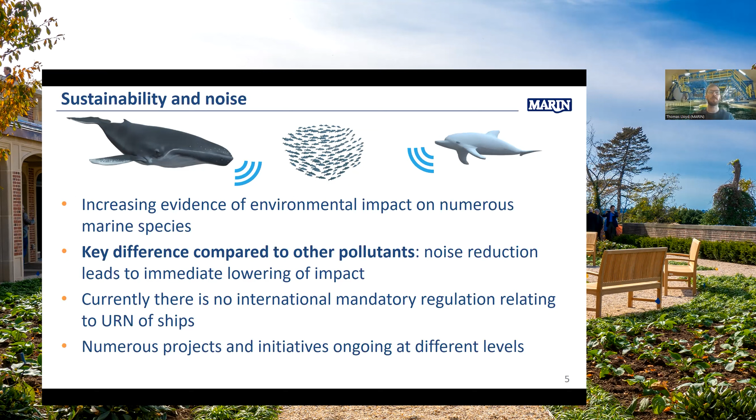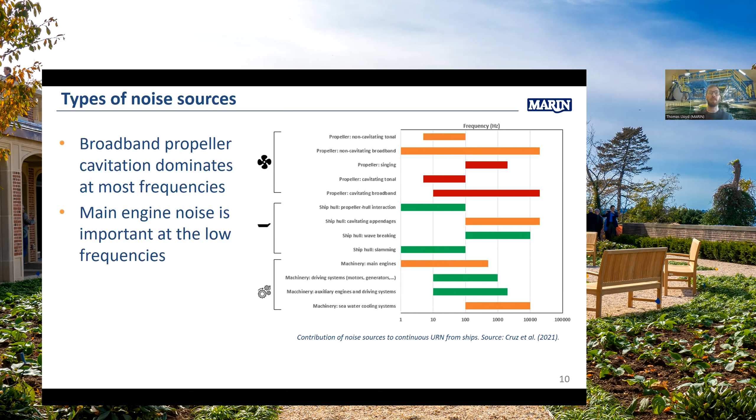Starting with noise sources. Here we can see an overview of continuous noise sources from ships. The main ones are propeller cavitation. At low frequencies, there are strong tonal components, but in general, broadband noise is important over a wider frequency range. At very low frequencies, the machinery noise from the main engines can be the dominant noise source, and this is certainly the case below the cavitation inception speed.

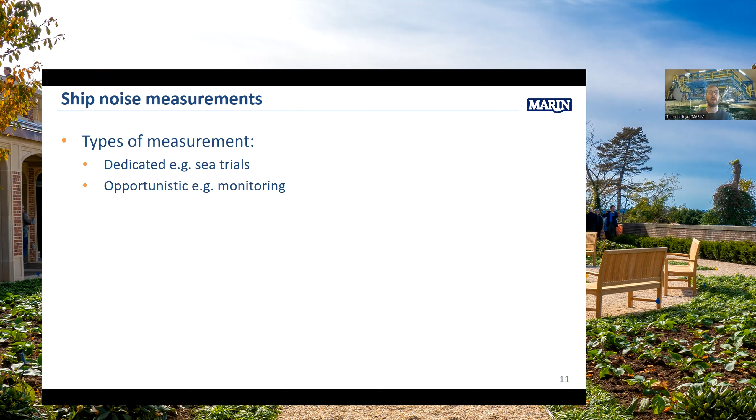So with those noise sources in mind, we now look at how ship noise is measured, of which there are 2 main types of measurement: so-called dedicated measurements, such as sea trials. These may be performed by shipyards who have a noise requirement in their design, or classification societies. And there are also opportunistic measurements, such as for monitoring purposes, in order to track the changes in ambient noise in a particular area over time.

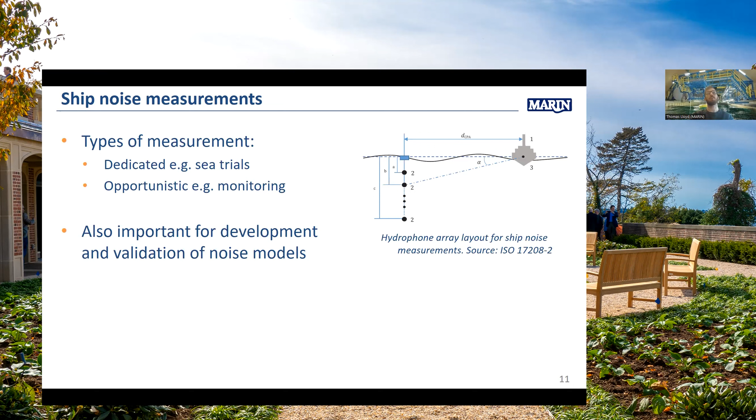And in order to perform measurements, procedures have been defined. Here we see an example from an ISO standard of recommendations of how to deploy hydrophones. In general, these types of measurements are also important for the development and validation of noise models, which I'll get to in the next slides.

This field is developing quite rapidly, and at the moment there are alternative proposals to deploying hydrophones, such as the use of onboard sensors and even drones. With onboard sensors, the idea is that you can monitor noise levels continuously across a whole voyage, which provides more information and can be used for real-time decision making. Drones have been proposed as a cheaper solution for performing noise measurements, but that's very much in its infancy at the moment, so we'll see what happens with that.

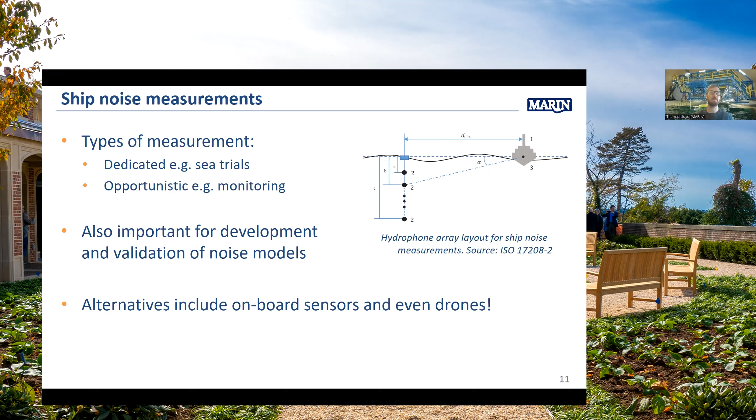Now a little bit about the standards. As I mentioned, there is an ISO standard for measuring noise, but it currently only applies to deep water conditions, while work is ongoing for a standard which can be used in shallow water, which is particularly important in Europe, but of course also in other parts of the world. Some other procedures have been proposed by classification societies and also by the ITTC, but we see some differences in the procedures in terms of how the measurements are performed and how the data is analyzed and corrected. That leads to difficulties in interpretation of the results and comparison between ships and between measurement locations, which has led to proposals for harmonization of the procedures in order to reduce this high uncertainty.

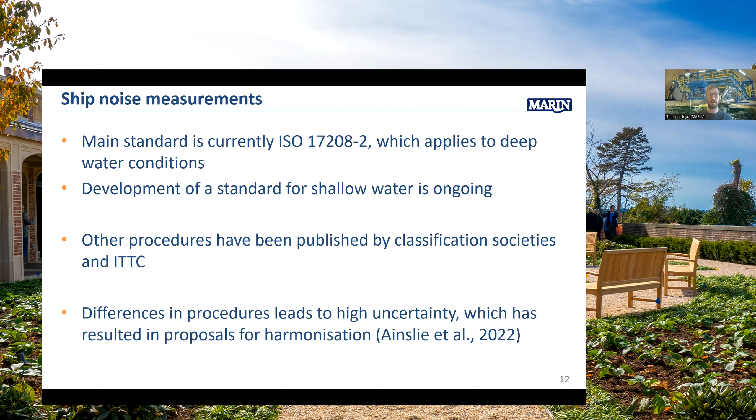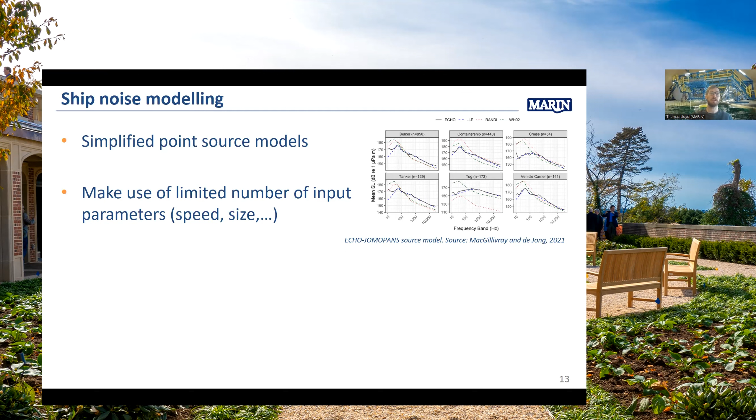Now moving on to modeling. Modeling in the context of noise mitigation is typically performed using simplified point source models. Here we see an example of a recently published model called the ECHO-JOMOPANS model. We have the frequency on the x-axis and the mean source level on the y-axis, and this model has been defined for 6 different ship types. It's an empirical model, and it can be used in combination with, for example, AIS data to perform modeling studies into the effects of noise in a particular environment. An advantage of this kind of model is that the number of required inputs is quite low, typically the speed of the vessel and a parameter related to the size, such as length or displacement.

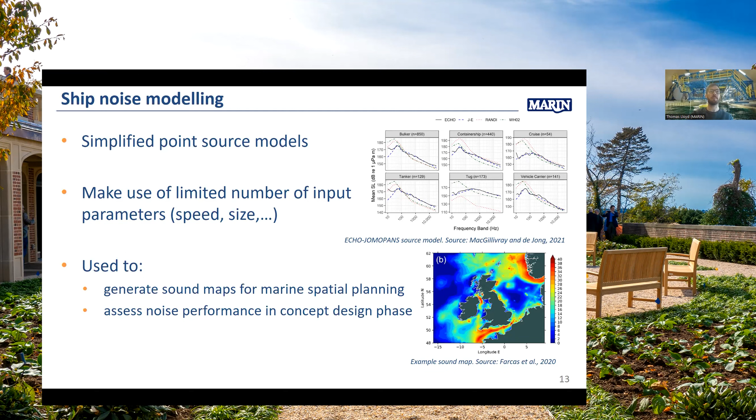So how are these sound maps generated? Well, you can use the AIS data, which is freely available, in order to look at the traffic density. Based on the traffic density, you can define the source levels and the noise footprint from the ships. Using propagation models, the sound level can be estimated at the receivers. In this case, in order to generate a map, points are defined across the whole geographical area, and that allows the total sound field from all the sources present in that region to be estimated. Following that, statistics can be defined in order to be used for marine spatial planning purposes.

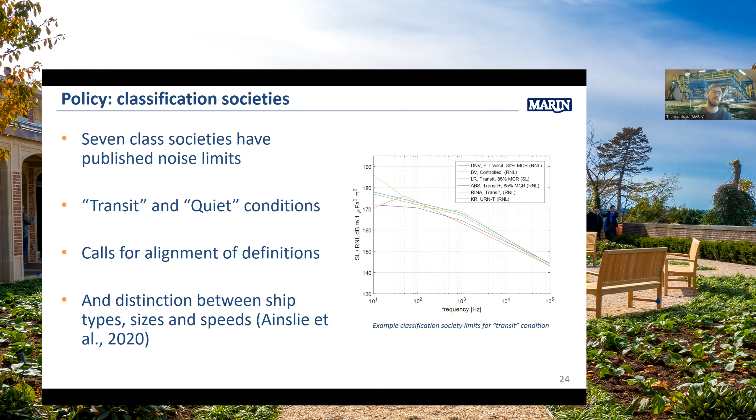So it is possible for commercial vessels to achieve these limits, and we'll see what happens in the future in terms of improvement of the limits, but also ship designs in general, looking to reduce noise levels.

And finally, regarding policy, I want to touch on voluntary certification, which, of course, again is not mandatory legislation, but it's a way of ship owners or operators demonstrating their environmental credentials. This doesn't just relate to noise, also to other environmental performance indicators.

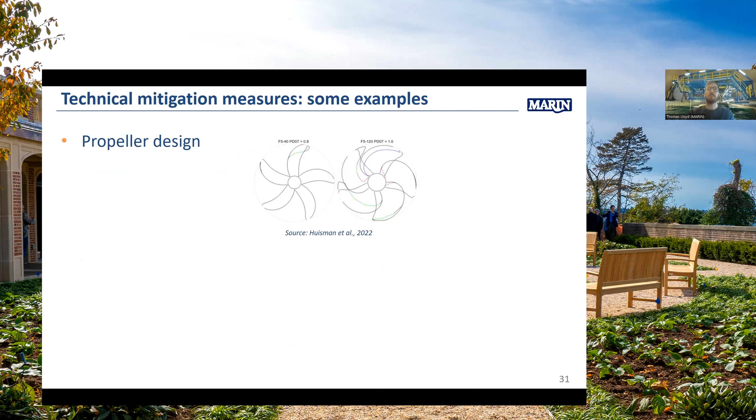Now I'd like to give some examples of mitigation measures, divided into technical measures and operational measures. Technical measures cover things like propeller design, reducing cavitation, noise generating cavitation, and changes in hull design, improving the wake field and the inflow into the propeller, which also reduces the cavitation dynamics, one of the main noise generation mechanisms.

Isolation of machinery: here you can see that the main path for machinery noise to radiate underwater is through the mountings onto the ship structure. If you can isolate the machinery from the ship structure, then you can drastically reduce this transfer of noise through the hull plating.

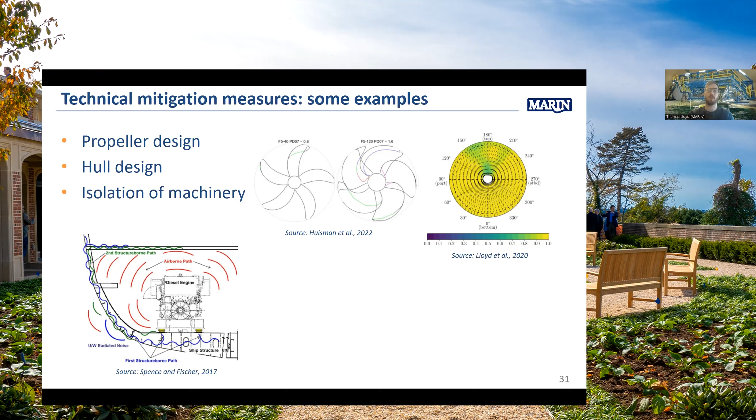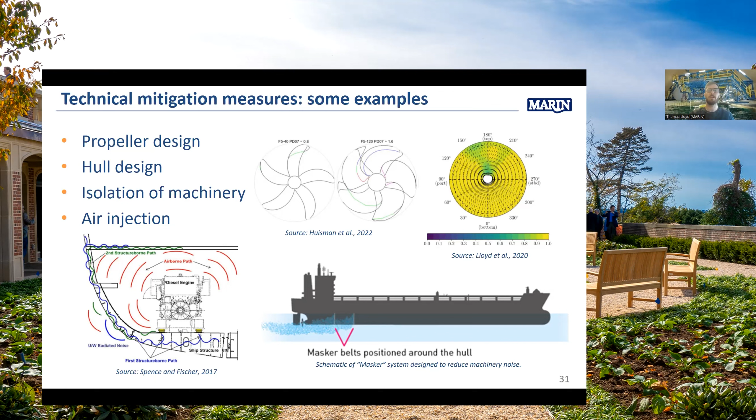Another concept is air injection. You can generate essentially a bubble curtain around the aft part of the hull, designed to shield and isolate the noise radiated from the machinery, but also potentially from the propeller. In this way, you have a system which can also be retrofitted. There are various options available, but it's important they are considered early on in the design process in order to reduce the costs which come with implementing one of them.

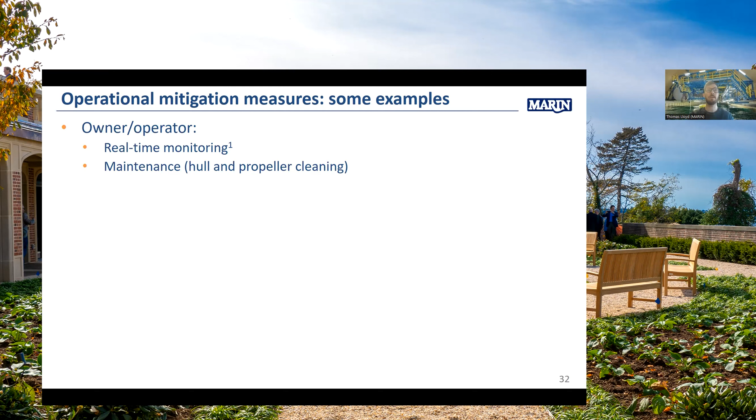Now we move to operational mitigation measures. These are generally split into two categories. We have those for which the owner or operator is responsible, such as real-time monitoring and maintenance. Real-time monitoring can be used to allow decision-making on the bridge in terms of noise levels, so the master can get a warning when exceeding a certain limit, and the system can advise what to do about that. Hull and propeller cleaning is important to reduce resistance and power requirement, but also therefore to reduce cavitation and noise radiation.

Some operational mitigation measures are the responsibility of authorities. That includes marine spatial planning, the imposition of speed limits, incentives, as we discussed in the context of ports, and possibly also the use of noise labels.

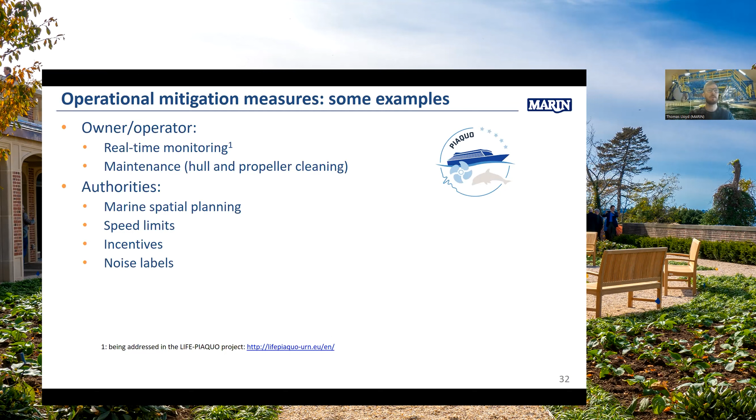It's important to note that roughly 15% of vessels are responsible for half of the radiated sound power. So the focus should really be on the noisiest vessels in order to get the most benefit.

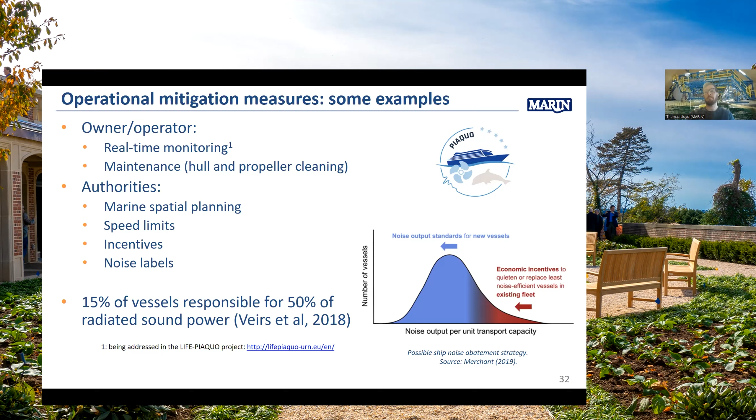Of course, these standards don't yet exist, but by bringing together the various stakeholders, it's hoped that these kind of quiet vessels can become more common in the future.

Now I'd like to show you a few results from the questionnaire that we distributed as part of the project. So we got about 100 responses from all over Europe, from different stakeholders, classification societies, naval architects, policy advisors, but also shipbuilders, ship owners. So a wide range of stakeholders.

And we wanted to look at the relationships between the different stakeholders, gauge perceptions about mitigation measures, and also assess readiness for tackling the issue of underwater radiated noise and the possible introduction of mandatory regulation in the short to medium term.

So we found that in terms of drivers and motivation for addressing the issue, environmental awareness was the most popular answer, with more than half of the participants saying that was their primary motivation. Policy was also mentioned a lot, despite the fact that most of the existing policy is guidance and not mandatory legislation.

And economical benefit was a less common main driver, which may be related to the distribution of stakeholders who replied to the survey.

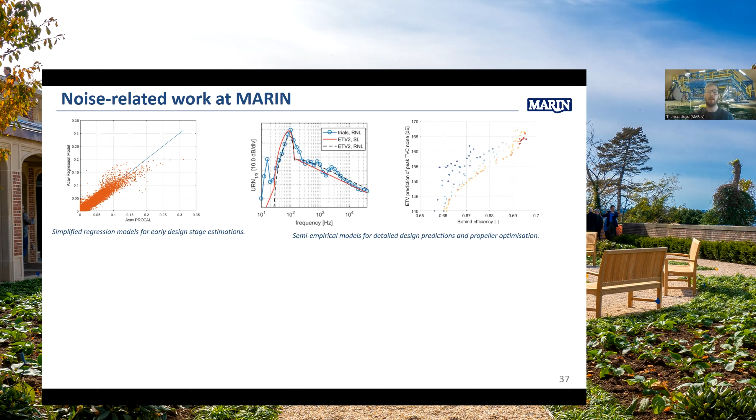So just to give you an overview, we have a number of different tools and facilities available for tackling noise. So we have simplified regression models for early design stage estimations. We have semi-empirical models for more detailed design predictions, which can also be combined with propeller optimization techniques to include noise in a propeller design.

Then we also perform high fidelity CFD in order to try and predict noise and verify designs before they are measured in one of our facilities, the depressurized wave basin. In this facility, which we use for cavitation model testing, we have a dedicated silent towing carriage, which is used for noise measurements.

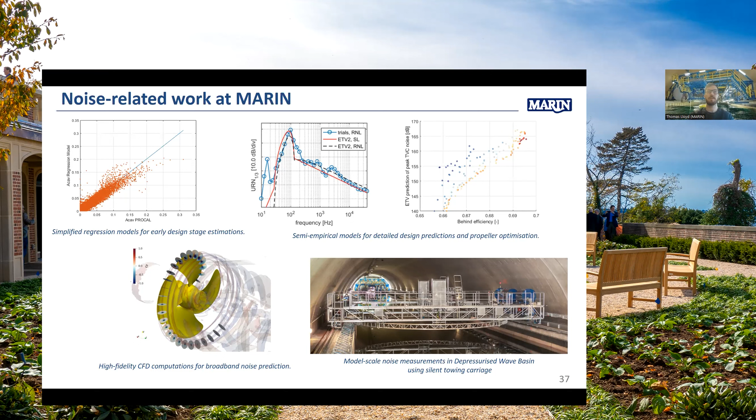So work on noise is performed through various different projects and initiatives. I'd just like to highlight a couple of those now. One of them is cooperative research ships. Here we work together with other researchers and industrial partners.

And in the context of noise, this led to the development of the so-called empirical tip vortex, or ETV model, which can be used to predict the noise from cavitating tip vortices of propellers. And this model has now been incorporated into our consultancy work.

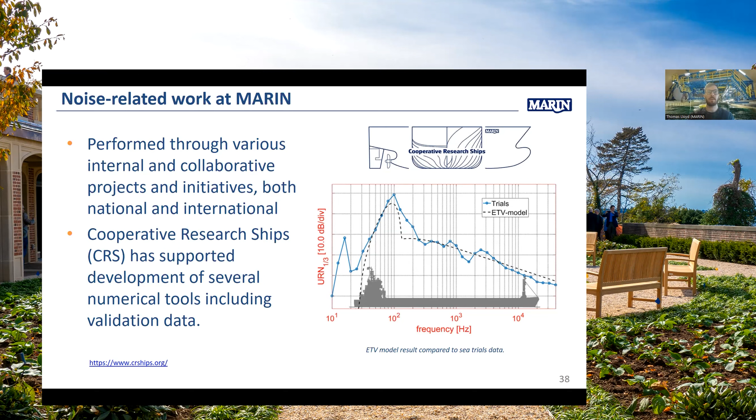And now I'd like to show you some results from recent and ongoing EU projects. One of them is called NAVAIS, a Horizon 2020 project focusing on modular ship design, in which we looked at including noise in early design stages in order to reduce overall impact of ships. An ongoing project is Saturn, which looks mainly at standardization, biological thresholds, and the assessment of mainly technical mitigation measures where we are involved.

In NAVAIS, we looked at two main vessel types. One was a double-ended road ferry, the other was a workboat, such as an aquaculture vessel. The reason is that these vessels operate for a large proportion of time in off-design conditions. In the case of the ferry, it spends a relatively large proportion of time decelerating, which leads to face-side cavitation on the propeller, known to cause high noise levels. In the case of the workboat, which can spend a large proportion of time in DP mode, the propellers can experience large amounts of cavitation.

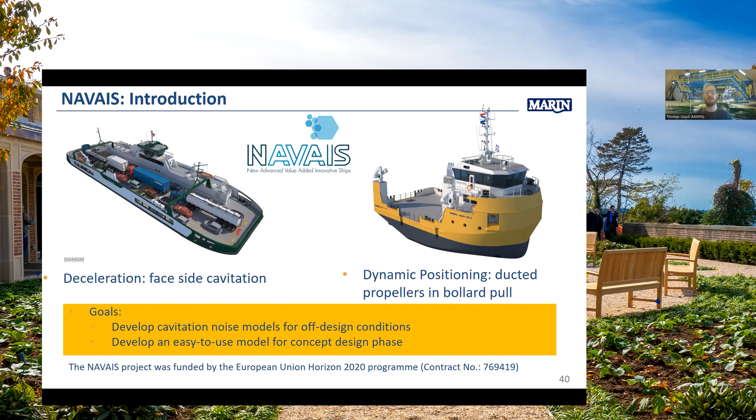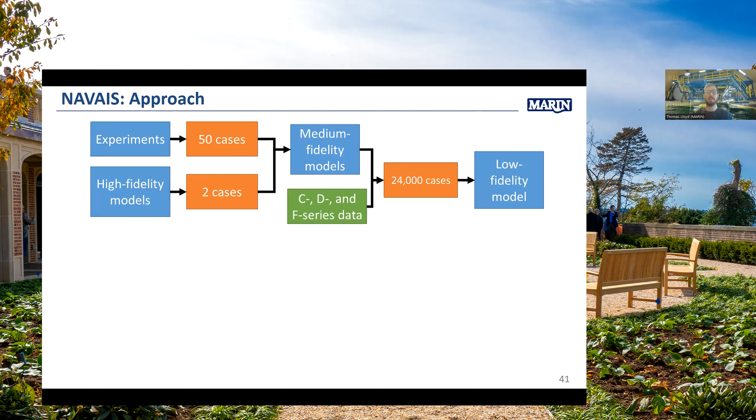The goal of this project was to develop new cavitation noise models for off-design conditions and implement them in an easy-to-use framework which could be applied during concept design of new vessels. We did this by performing a lot of experiments in our depressurized wave basin. You can see a photo from a test of a cavitating propeller behind a thruster. We complemented those results with some CFD simulations, and that led to the development of new medium fidelity models, similar to the ETV model I presented on the previous slide.

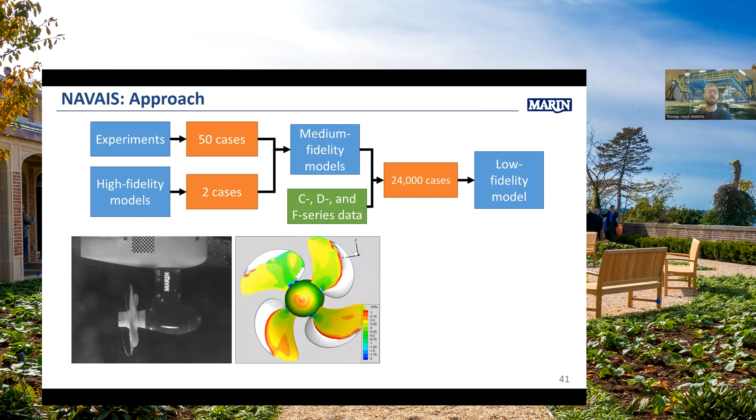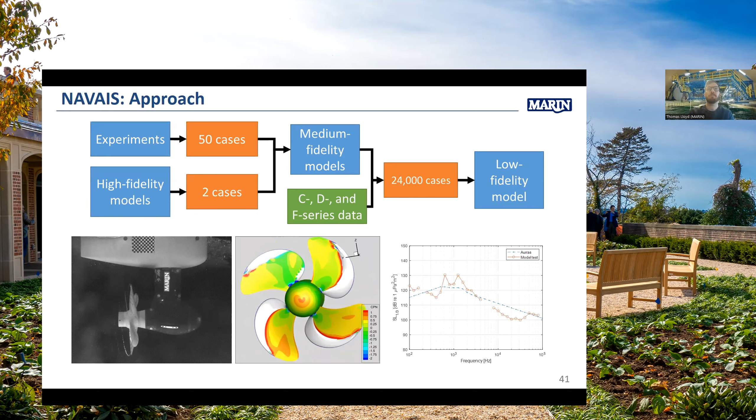This model has been implemented in a software tool called AURRAS, and the idea here is that you can look at the expected noise levels from the cavitating propeller in different conditions—not just steady sailing, as required for example by classification societies, but also when the vessel is accelerating or decelerating. You can also compare the estimated noise levels to the limits proposed by the classification societies.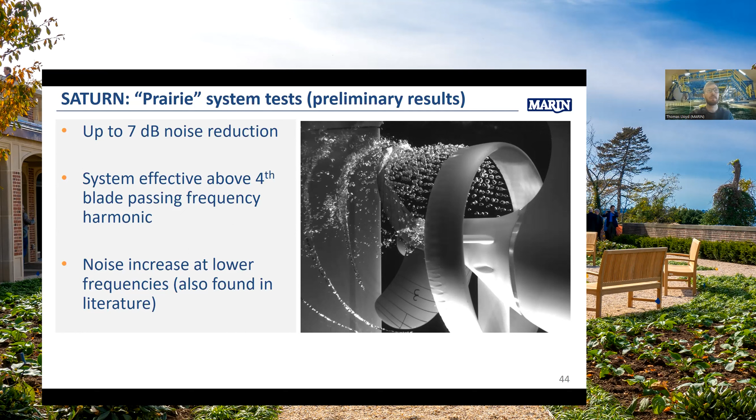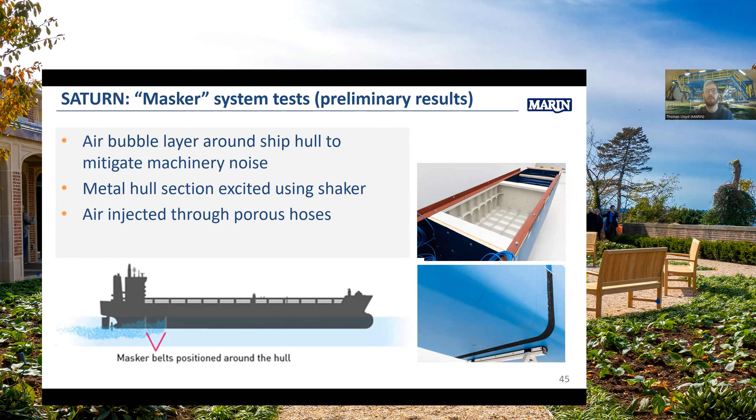Another system is the masker system, which generates a bubble curtain around the ship hull. This is mainly aimed at mitigating machinery noise. So we constructed a model scale metal ship section, which we excited using a shaker in the tank. We injected air through porous hoses, which you can see on the bottom right, in order to generate the bubble layer. Here's a photo from those model tests—you can see the bubbles flowing along the hull. With this system, we measured up to 20 decibels of noise reduction.

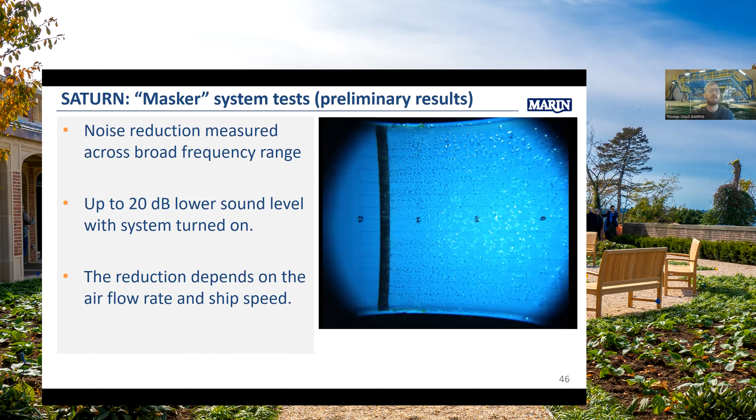This is all ongoing work, and we're very excited to be able to report this next year. So hopefully I'll be able to update this in the near future.

Some concluding remarks. I hope I've given you a good overview of the field of underwater radiated noise from ships, and demonstrated that it's very active at the moment, involving numerous stakeholders. The current focus is on thresholds, standardization, and trade-off analysis in order to define the best mitigation measures. MARIN is engaged in a number of different activities, from concept design through to design verification and payload optimization, as well as background research on mitigation measures.

I'd just like to close with this slide, some food for thought, and something maybe to discuss: what are the win-win scenarios in terms of reducing both underwater radiated noise and greenhouse gas emissions from ships? So thank you for your attention, and if you have any questions, I'll be very happy to answer them.

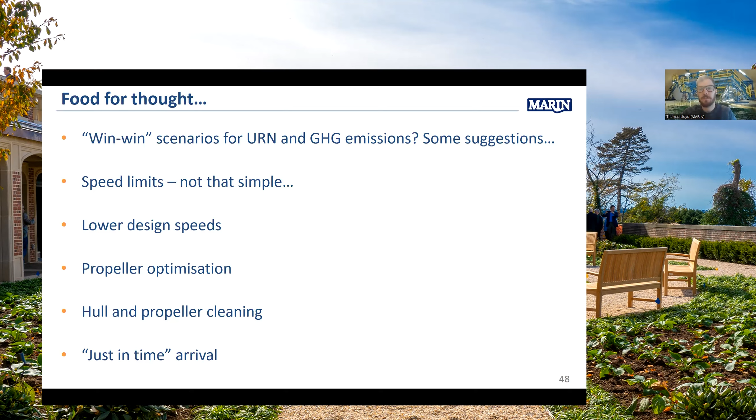And in terms of the masker system, well, it's designed to generate a curtain around the aft ship to shield the noise radiated from the machinery room. So the question is, does the air then flow towards the propeller? But I suppose in that case, the lessons learned from air lubrication systems would be transferable, and hopefully, again, the effect on propulsive performance would be small. But that is an important consideration when investigating these systems. Well, thank you very much, Thomas.